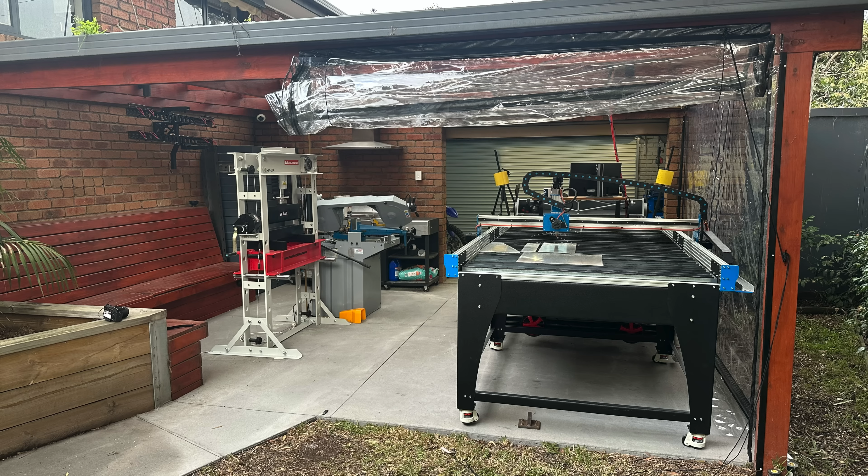In this video, I'm deleting my outdoor entertaining area and making room for a shed and garage expansion. I'll be setting up some new equipment, including a CNC Plasma Table, a Panbrake, press, bandsaw, and more. Once this is finished, I'm going to give you a tour of my garage and tiny shed, which has now morphed into an engineering workshop.

First things first, let's start with the garage. It's looking a little tired and dreary and could use a fresh lick of paint to brighten it all up. Cue the time lapse.

Geez, that looks a little bit better. Shout out to George and Daniel for the help on this one. They did a marvellous job.

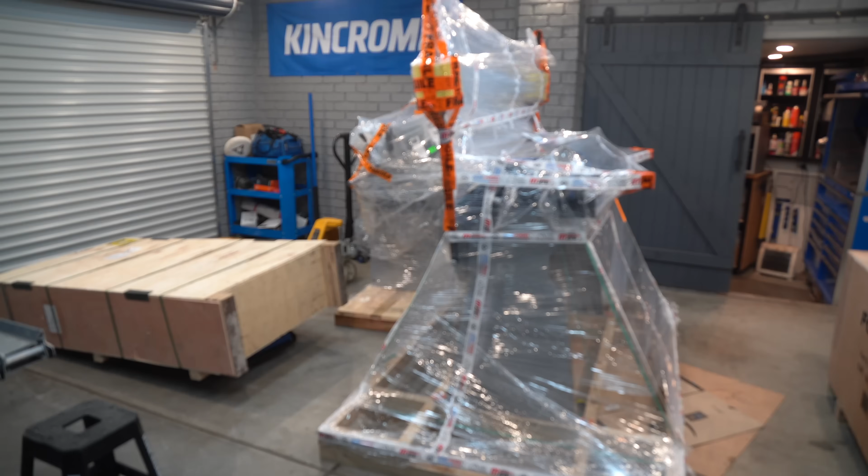So as part of this shed upgrade, I have a huge delivery from Hare & Forbes Machinery House. And I know what you're thinking, where are you going to put this stuff, Rich? That's a really, really good question. And the answer lies within my outdoor entertaining area. So let's go have a look at that.

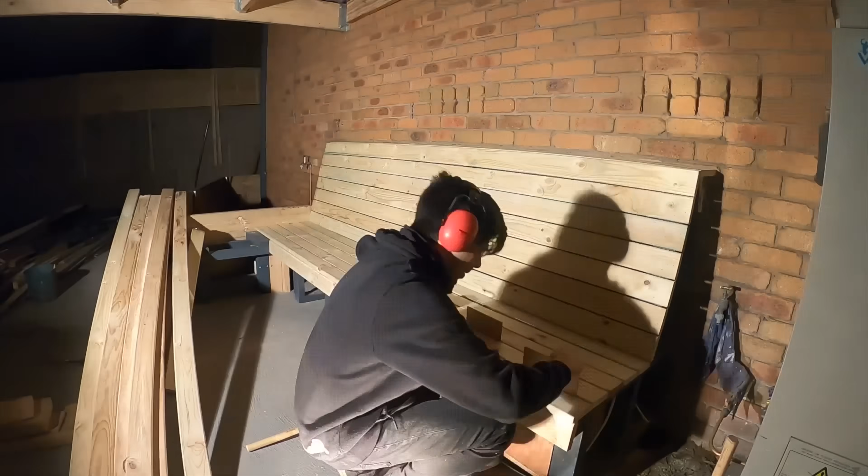This is my backyard, and I've proudly crafted everything you see here from scratch over the past 5 years, and turned it into a usable outdoor area where I enjoy kicking back and having a beer. While this space is really nice to have, it's used infrequently, and it's prime real estate for a shed expansion. All I've got to do is remove the table and chairs, put some walls up, and we're good to go.

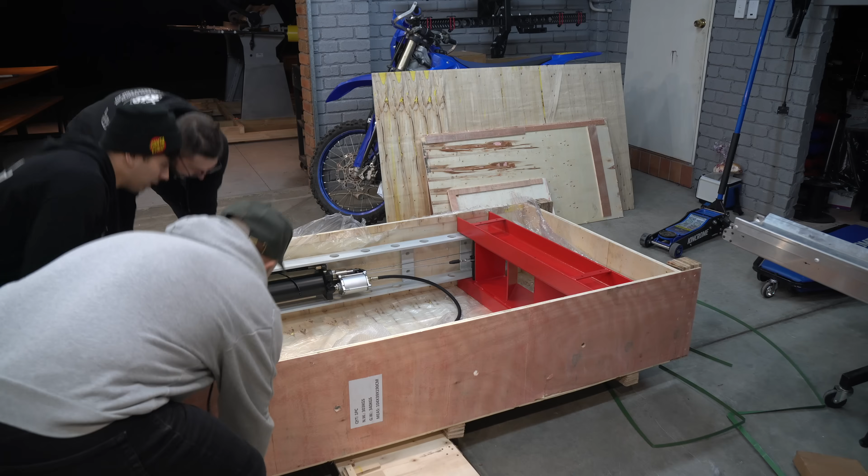Now that you've seen where this stuff's going to go, let's open it up and I'll give you a bit of a run through of what I have. What I'm unwrapping here is a Panbrake, a bandsaw, an air compressor, and a pneumatic hydraulic press. These tools, in conjunction with the CNC Plasma Table, are a mega upgrade to my shed and will significantly change what I can make at home. Later on in this video, we'll go into all the details of these tools, but for now, watch me struggle to set everything up in this tiny little space.

This is a car trailer with a full-size Blue Carve CNC plasma table on it. The challenge is to get it off without a forklift, as that's how it was loaded on, without sustaining any damage. Let's see how we go.

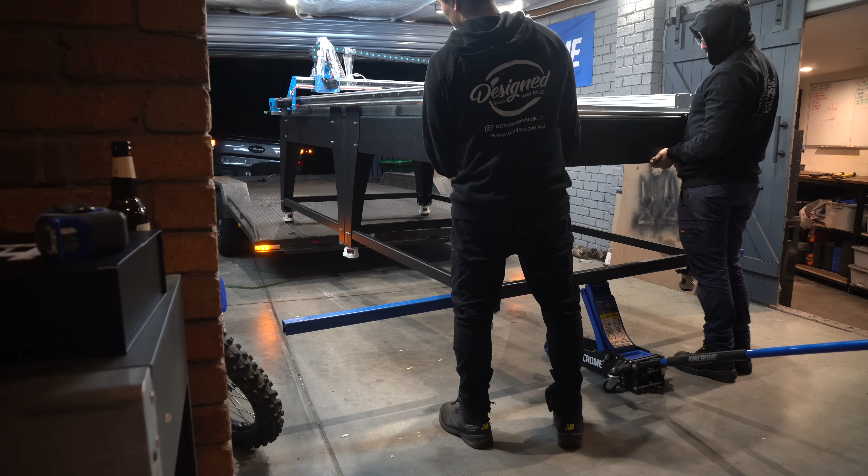Look at that, superior jacking control. I just want to give a huge shout out to the team down at Hare & Forbes for helping me out with all this new equipment.

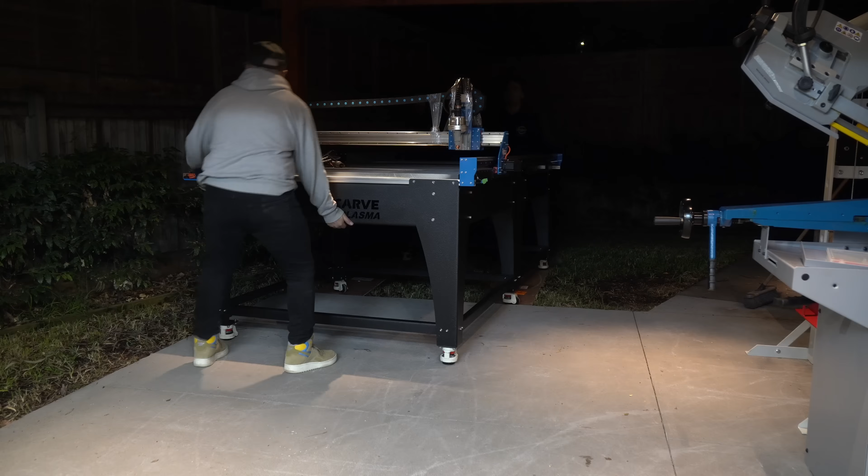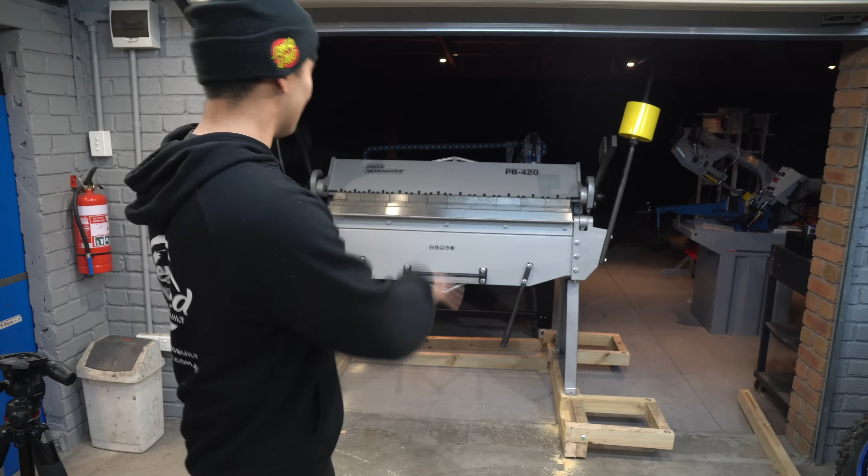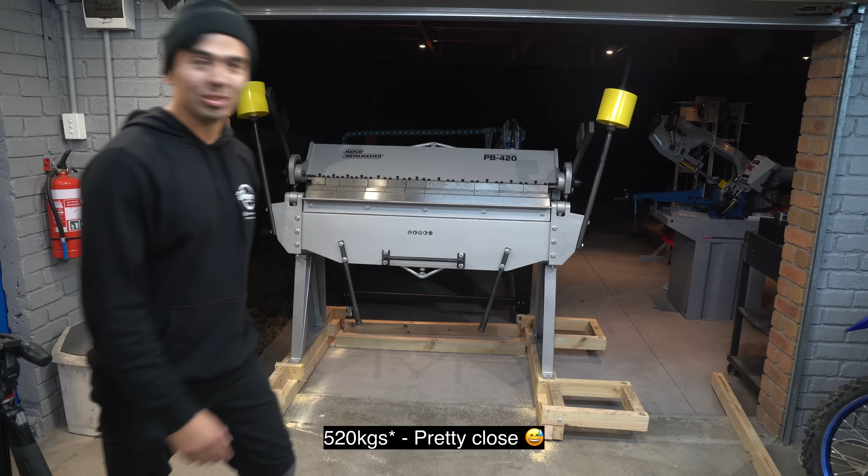So everything we think is in position, but we have one big problem. This is really heavy. I'd estimate like, I don't know, 500 kilos or something like that. So what we're going to do is get a jack under there with a piece of timber and hope for the best, really.

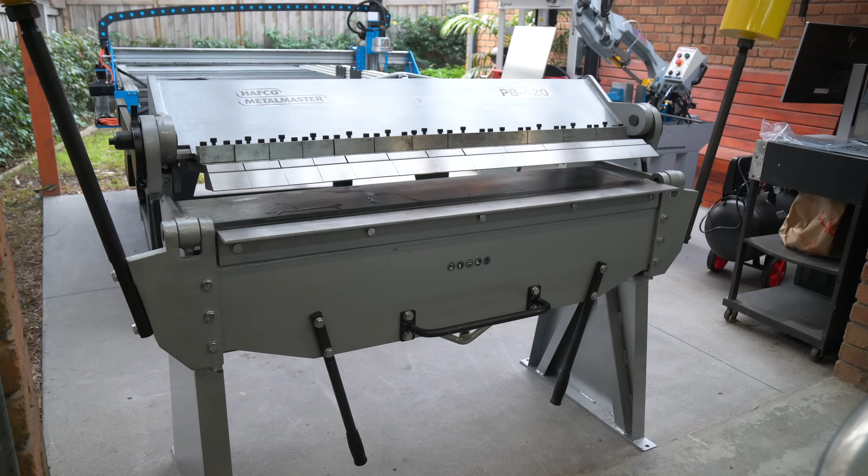And the next morning, my shed expansion was revealed. Still a lovely place to kick back and have a beer, but now I'd be staring at machinery. All of the new equipment required a bit of setting up. The folks at Hare & Forbes had done a lot of it for me with the Panbrake and the bandsaw, so I could get started with the plasma table.

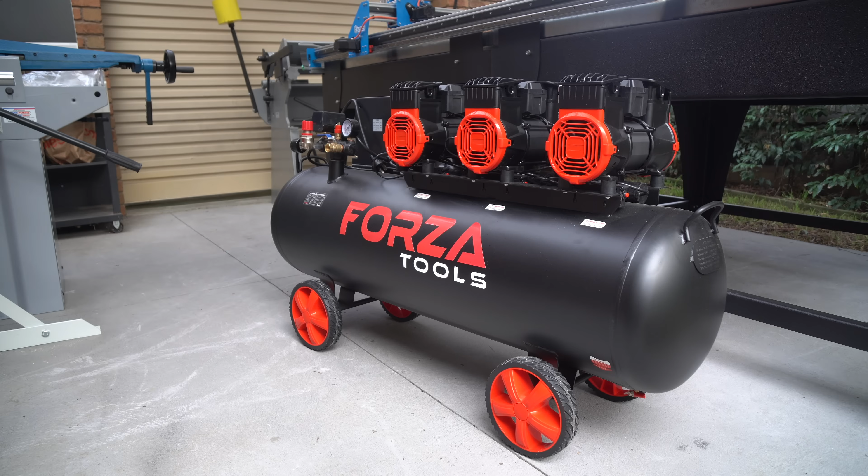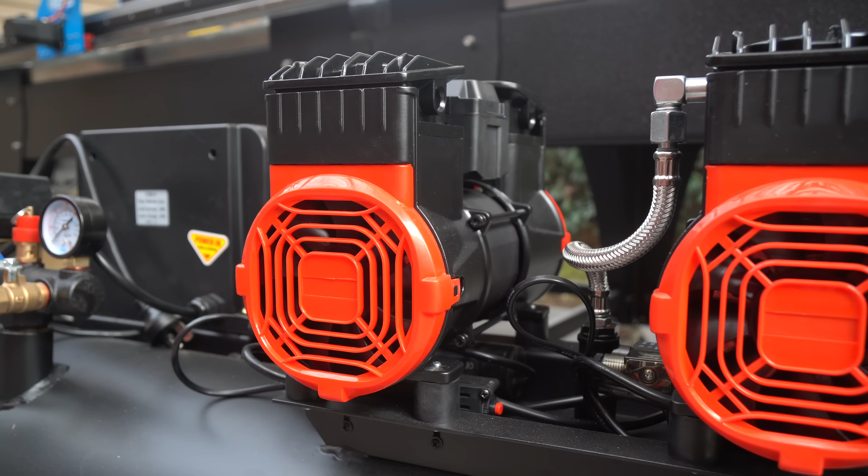To run the plasma table, you need a good compressor. This is a Forza Tools 120 litre 3300 watt Hush air compressor, so it's pretty quiet, with a free air delivery of 280 litres a minute that I got from Hare & Forbes, which would be powerful enough for my setup. The table also requires the BlueCarve controller, a plasma cutter, e-stop, and a computer of some sort, and I wanted to mount it all so it was nice and neat. Luckily for me, BlueCarve have designed this plasma table with some free space underneath, and I'm going to take advantage of it. I had some aluminium offcuts lying around, and the plan was to suspend the compressor and make a shelf to mount everything underneath the table. This way it would be all off the ground and make cleaning and moving the table a lot easier.

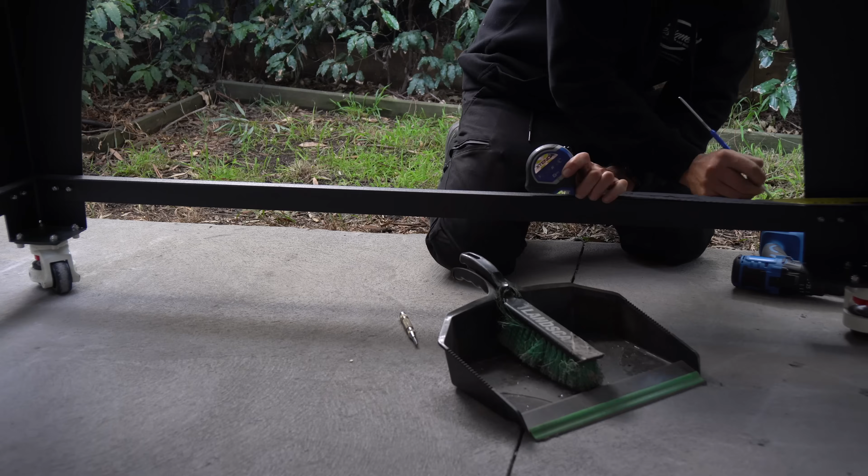Dulux Duramax Semi-Gloss Satin Black, not a sponsor, but absolutely could be. I'd opted to bolt everything under the table. Normally the welder is the first thing that I reach for in the shed, but I didn't want to wreck the shiny new powder coat, so bolting seemed like the more sensible option.

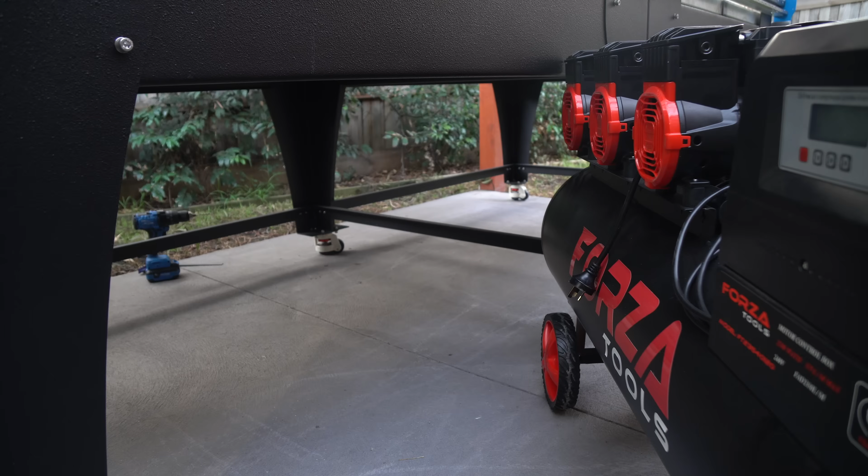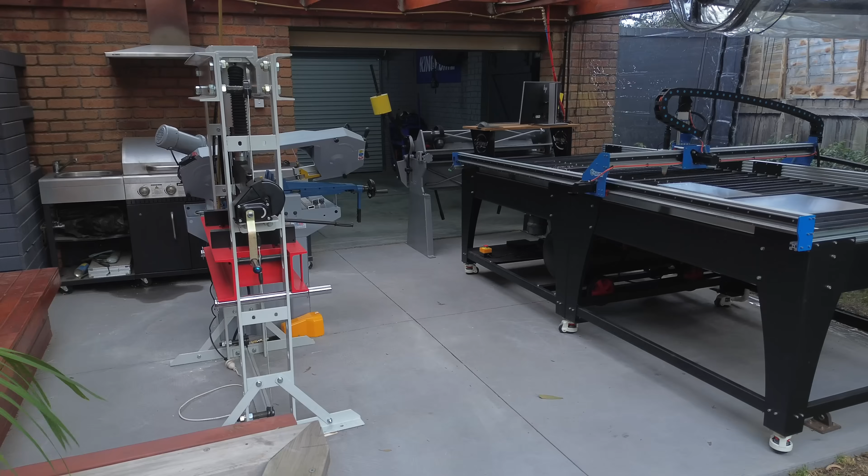Now you may be wondering why I'm upgrading this space and not moving into a bigger one. Let me tell you about it quickly. I would love a bigger space, I really would. There are a few options I have, but they would mean taking on more financial pressure by getting a bigger mortgage or renting a factory. I don't really want to be in a position where I have to take on more work to afford a space that I don't have the time to use because I'm working so much to pay for it.

For me personally, the type of work I really want to be doing is developing my own products and passion projects, and to do this, the thing I need most is time. The main reason I'm upgrading everything at home is to save time. Currently I have to drive half an hour to go cut something on the plasma table, which doesn't sound too bad, but if I got a dimension wrong or the bracket needed to be designed differently, I could potentially burn a whole day going back and forth, burning fuel and most importantly, my time.

I look up to a lot of engineering entrepreneurs who started their business from sheds. James Dyson, for example, made 5,127 Cyclone vacuum cleaners over 5 years in his shed before he was able to bring his product to market and turn it into a $22 billion company. And if that isn't inspiration enough, then I don't know what is. They ran lean for as long as possible, and that's what I plan to do as well.

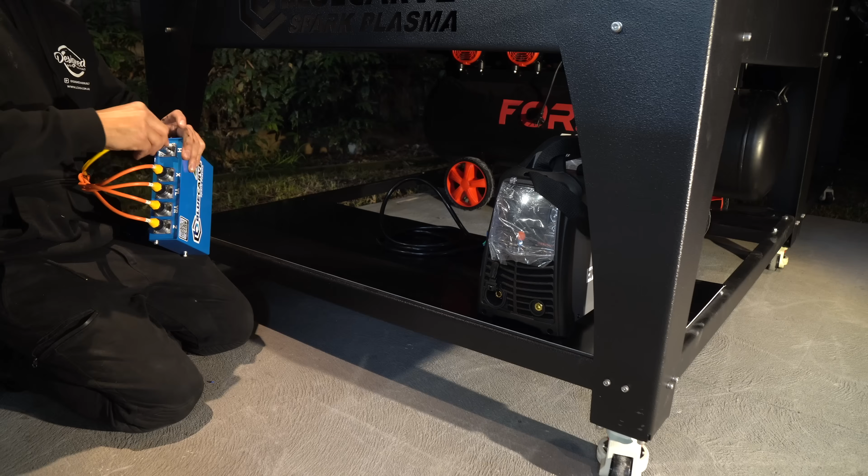Alrighty, so you can see here I've got my new shelf. I've got everything installed on it. So now what I need to do is build a computer desk and also clean up the cables, because that hurts my eyes.

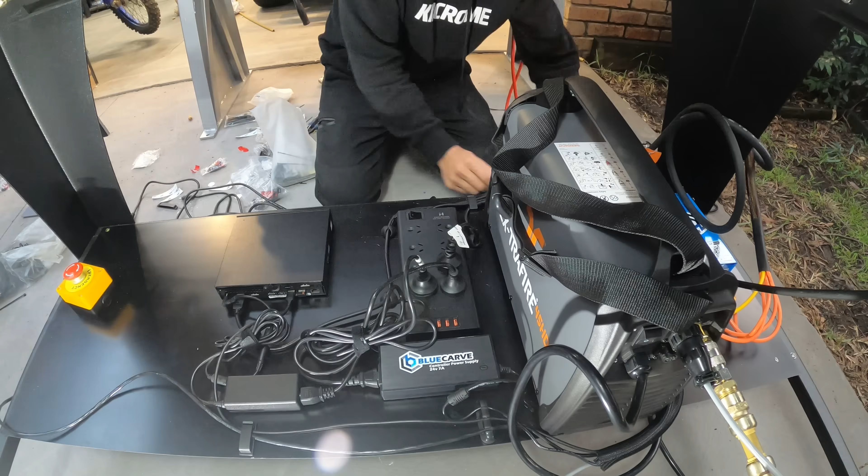All the cable routing is done now and everything is Velcro down, so you can pull it off if you need to, but otherwise it's not going anywhere.

Now that the wiring was done, it was time to move on to the air plumbing. It wasn't just the table getting plumbed, my whole workshop was getting some TLC. We're using plumbing fittings and plumbing lines to hook up the air lines for the compressor, plumbing everything from the compressor underneath the plasma. You'll have lines coming up off this to the press, to the plasma, through the workshop, and to the hose reel as well.

Wouldn't read about it, Rich. You wouldn't read about it. Alright, so now you can see the compressor set up there, air filter set up there.

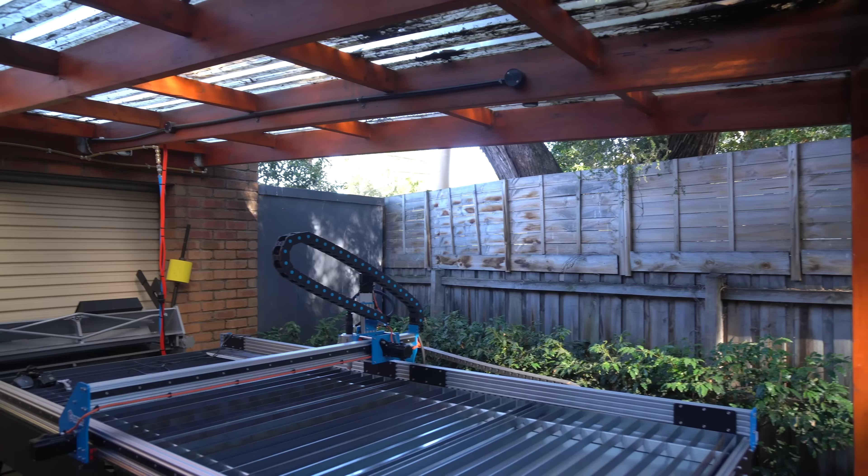Alright, so you can see the outdoor space now, and one of the big problems I have is water ingress. I don't want rain coming onto all my shiny new machines. So the plan is, there are a couple of thoughts here. I could put walls up and make it all clad and nice, but it is an outdoor area and I don't think that's going to really add any value to the house.

The other option is to just use clear plastic drop sheets, one here and then two long ones over there, and that will just keep it an outdoor area. It's not too much effort, hopefully. I'm about to do it right now, so we'll watch this space and find out.

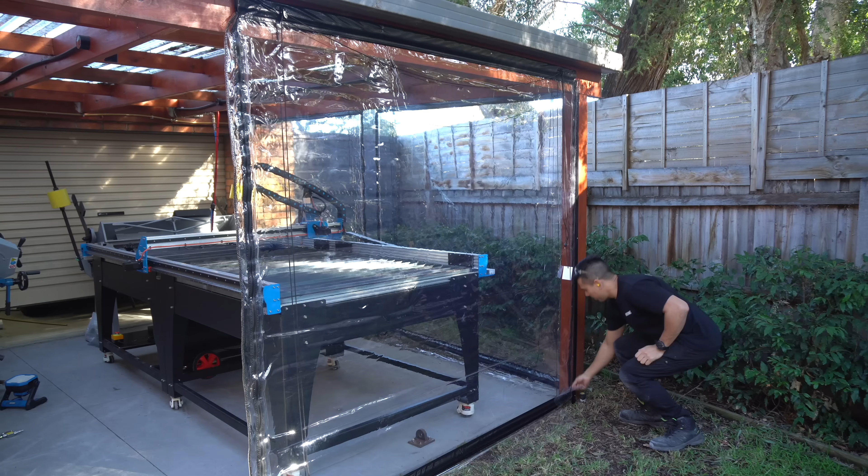Righty, so these clear curtains are all done now and they're anchored to the ground, but I can actually move them up, and I think I will. When I'm doing a lot of cutting, you can get dross splash and that sort of stuff and water, so I don't ruin them I'll just roll them up, which is quite good. It's actually quite good for the setup.

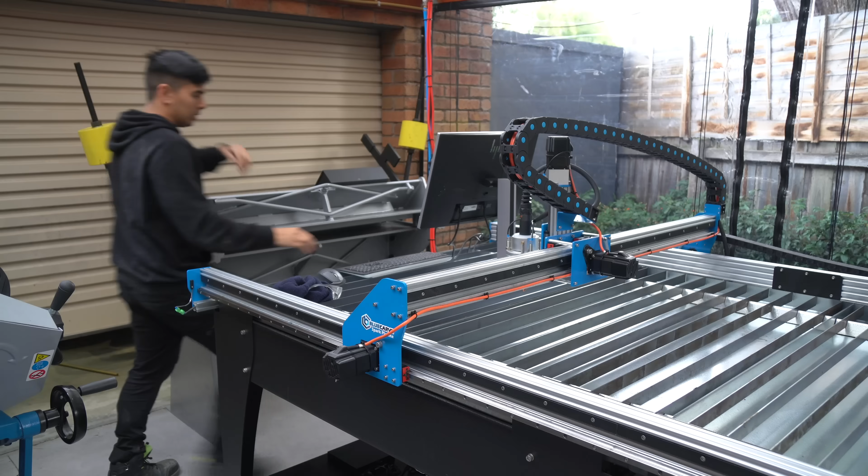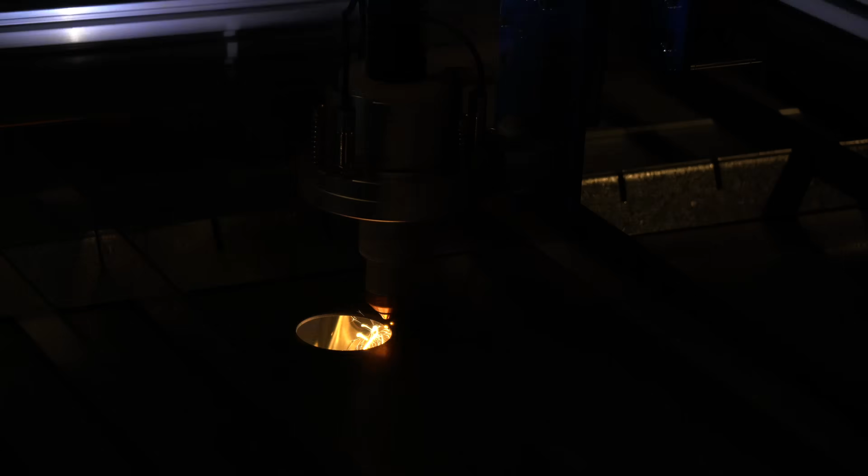It was finally alive, and I wanted to put drain holes in the waterbed so I could change the fluid easily when it came time. You don't have to do this, you could suck it out every time, but it seemed like a pretty easy thing to do while it was all empty. I'd spent a few hours putting in the right cut settings and dialing in the cuts. Now that it was up and running, I could use it to cut its own drain holes.

Time to plumb the drains. We were using pretty standard plumbing drains and had 3D printed a spacer to ensure the thread had engagement. George, my neighbour, had graciously offered to help, and with all his plumbing expertise, he managed to knock it out pretty quickly.

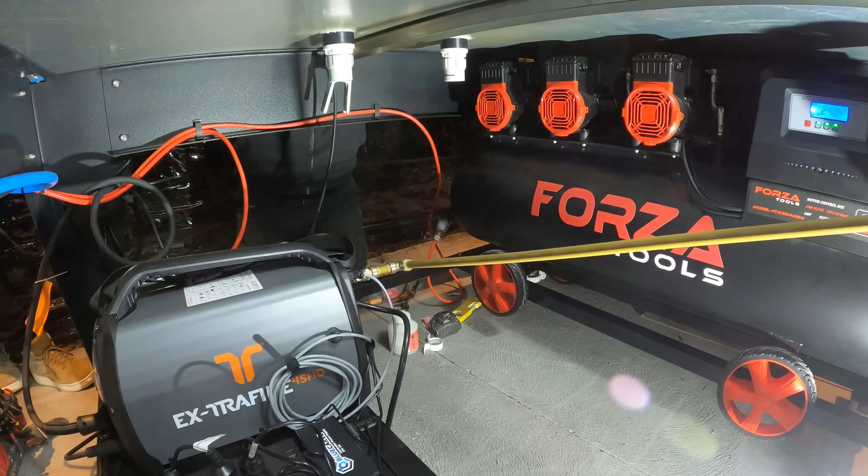Thanks, Georgie. You're welcome.

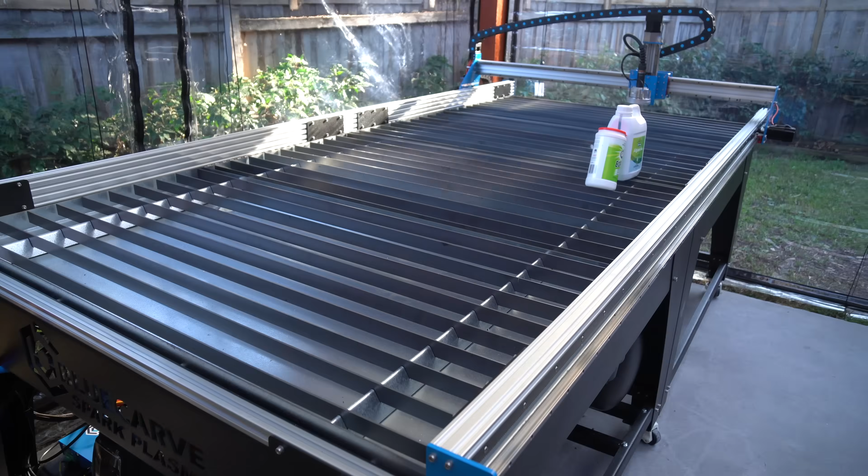I could now fill up the waterbed, and I was using some borax and algicide to keep the water mold free. So the drains to my plasma are all run now, and I'm going to put a flex hose, or just a hose, on the end of that, and yeah, we can empty it into whatever.

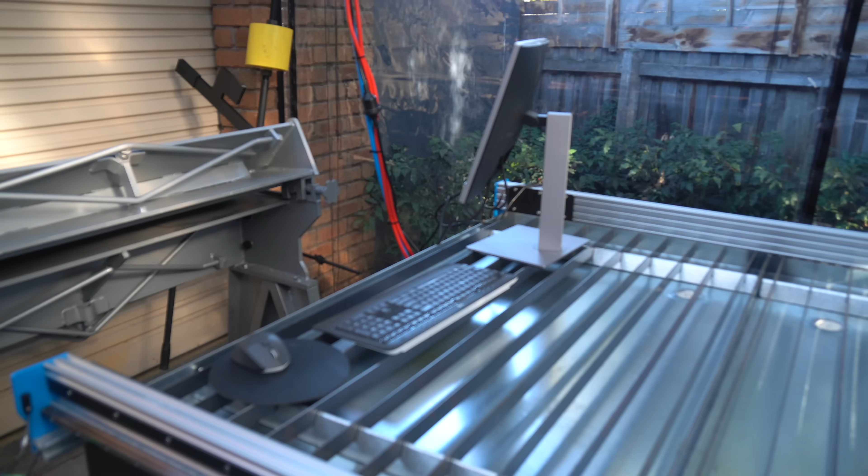Now that the drains were complete, it was time to build a proper spot for the computer, which had been sitting on the plasma bed until now. If only I had a way to fabricate some brackets.

Now that I had my dimensions, it was time to draw up the desk mounts in CAD. And in a first for the channel, I'm going to explain how I modelled it.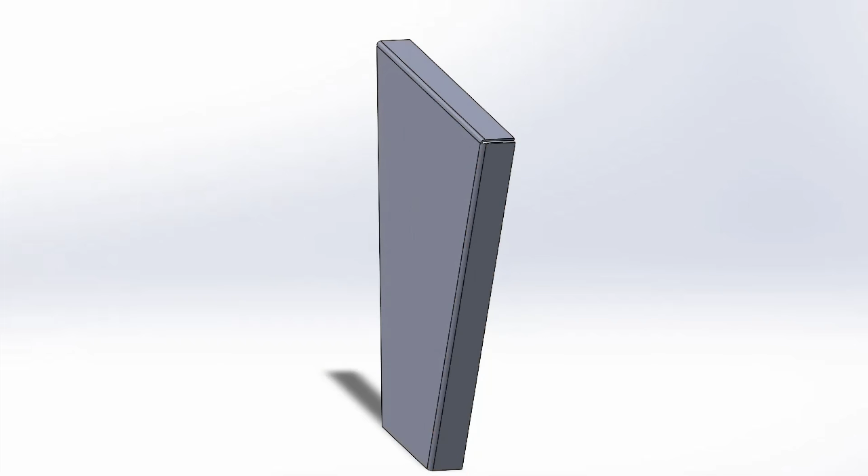I started with the outside geometry, extruded it by 50mm, which would be the overall width. I then used the convert to sheet metal function, choosing the back and the side edge for where I wanted my bends to go. I then added fillets so I wouldn't cut myself on the piece.

Looking pretty good now, time for some holes. On the back flange, I added two 9mm holes, which would mount into the table, using a linear sketch pattern and a cut extrude. On the top flange, I did the same, but there were 3 holes, for the fixing holes to the table.

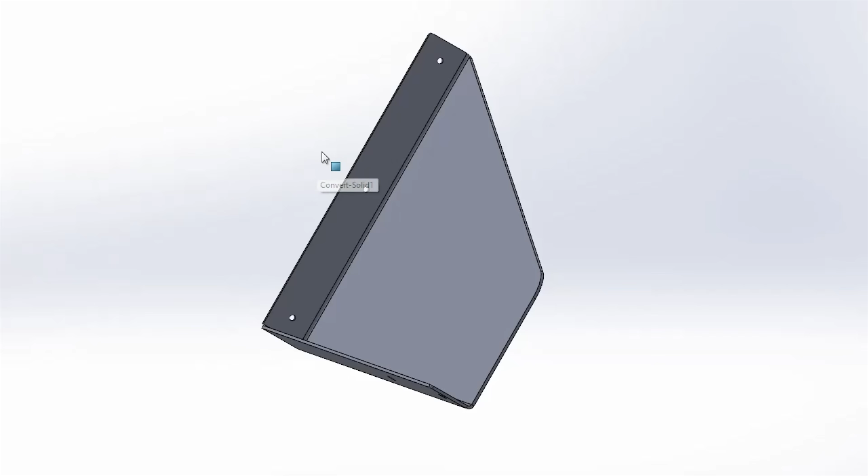Now for the finishing touches. It's time to add my logo, which I brought in as a vector file. I mucked around with it, scaling it and getting it into the right spot before I could cut extrude it through. Then I added in some little bits to keep the middle of the letters using a boss extrude.

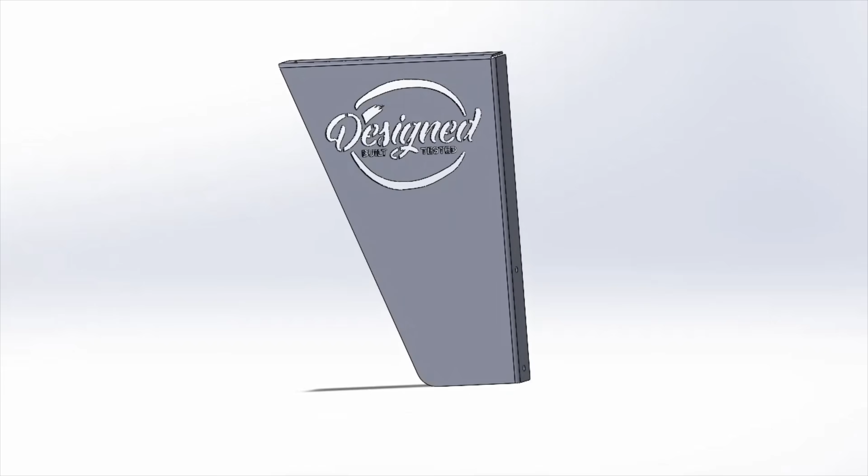Now, normally you hear me bang on about how long things take to model on this channel, and they do, especially something like a suspension system or a complicated full car assembly. Something like this though is relatively simple and a great one to get started on. This actually took me 6 minutes to model, 2 minutes to get my shape in sheet metal, and then 4 minutes to muck around with the logo. For anyone who's messed around with logos in CAD before, you'll understand that it's never that straightforward.

Okay, so this is done. Now we're ready to cut it out on the plasma table. This is really the first cut that the plasma has done. I did some circles yesterday just to practice for the drain hole, and they came out really clean, to be honest. Let me show you how easy this thing is to use.

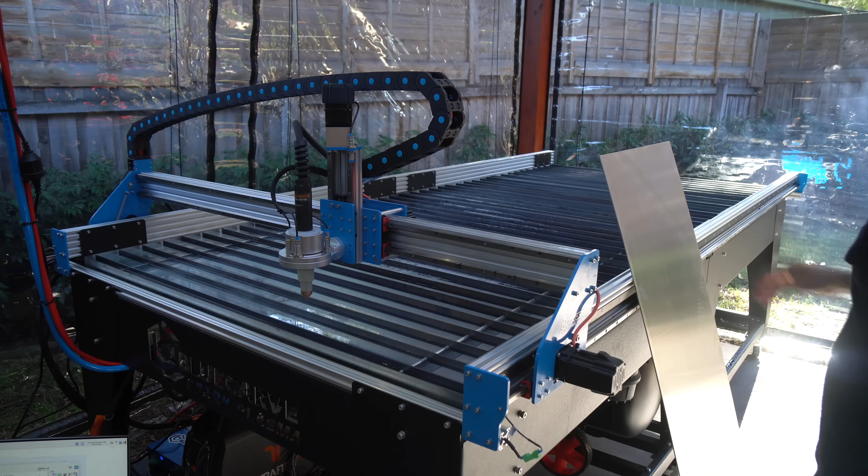Basically, just put the sheet on. I've got a heap of scrap material. Line it up - I generally do that by eye. Actually, it's not a good edge to line it up on.

Once my files are nested, I use a function on the MyPlas software which outlines the perimeter of the cutting area and allows me to make sure that my material is big enough.

Excitingly, it's time to cut the first piece now. Unfortunately, I had the settings for the lead-ins wrong on this one, and it was piercing on the outside of the holes instead of the inside. It looks pretty bad, so I'll have to cut this piece again.

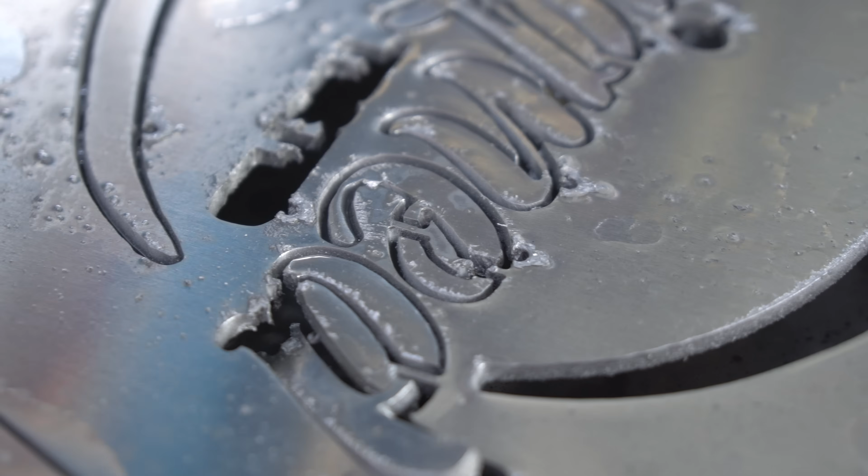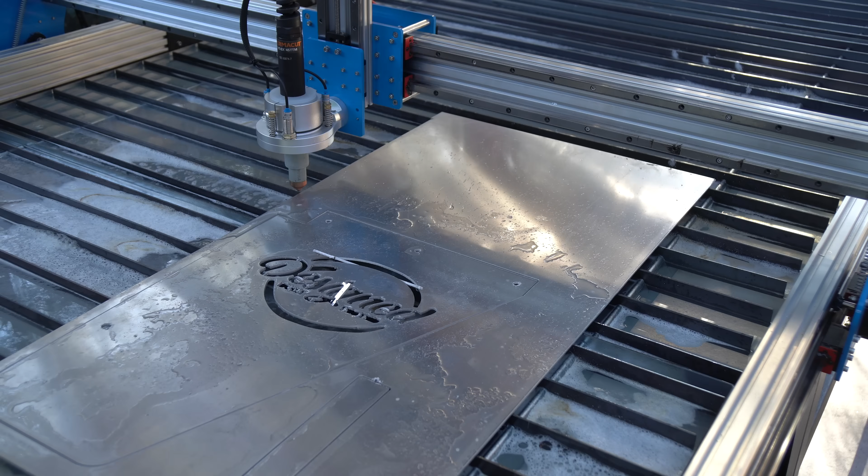I changed the lead-in settings and it was now piercing on the inside of the waste material and cutting brilliantly. Once that was done, I cut the other bracket, and I could use the manual guillotine function to chop off the waste material from the part of the sheet that I wanted to keep.

At this point, you may be wondering how this will go with my neighbours and all the noise, and that's a fair question. I just want to say that I get along really well with my neighbours, and a setup like this makes less noise than an angle grinder, and I'm respectful. I'll only cut during business hours.

I don't plan on doing cut jobs for other people. While I could use this machine to make money, I have to be selective of where I focus my energy. It really is for doing my own projects and prototyping. I may only run it 2 to 3 times a week for 10 minutes a time, and it doesn't sound like it's going to get a lot of use, but that's only for now, and the circumstances may change and we may move into a bigger facility and have more people using it in the future.

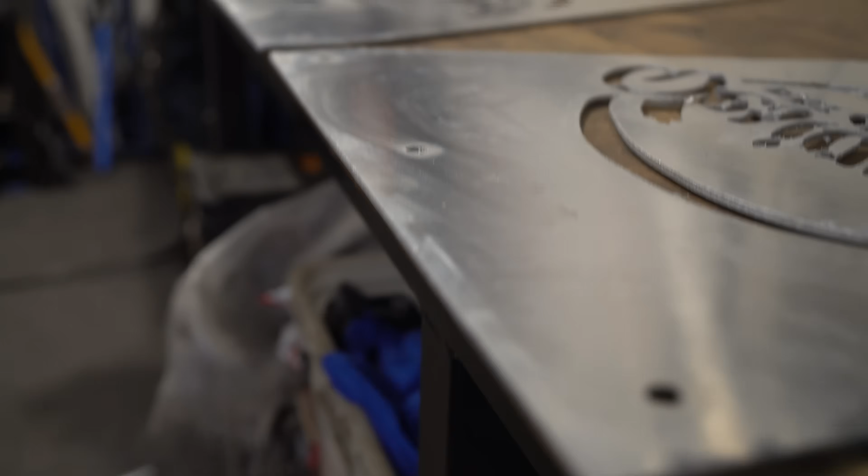Looking at the pieces now, you can see the backside, it's very clean. This is out of the box, not fiddling with any settings, and there's barely any dross along these edges. You can see some bits with a little extra dross build up, but honestly, pretty amazing out of the box.

Just reflecting on it, last time I got this logo cut about this size, I actually deleted the build and the test because the laser couldn't do it. It's just too much heat concentrated in such a small area in such a quick time, and it kept blowing through as well.

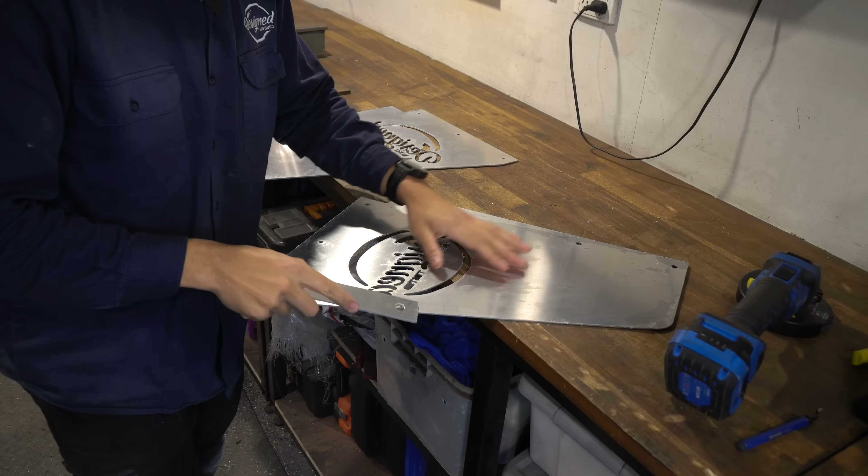They say if it's cutting well, you should just be able to knock the dross off with another bit of alloy or steel or something like that, and you can do that. But honestly, I find one of these stripper discs is better. I think it's quicker, you just run over it once. It's not too abrasive, it doesn't take off too much.

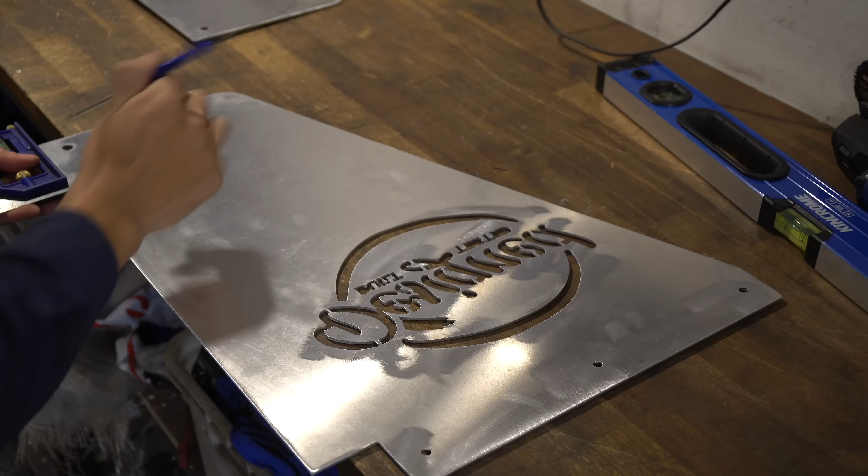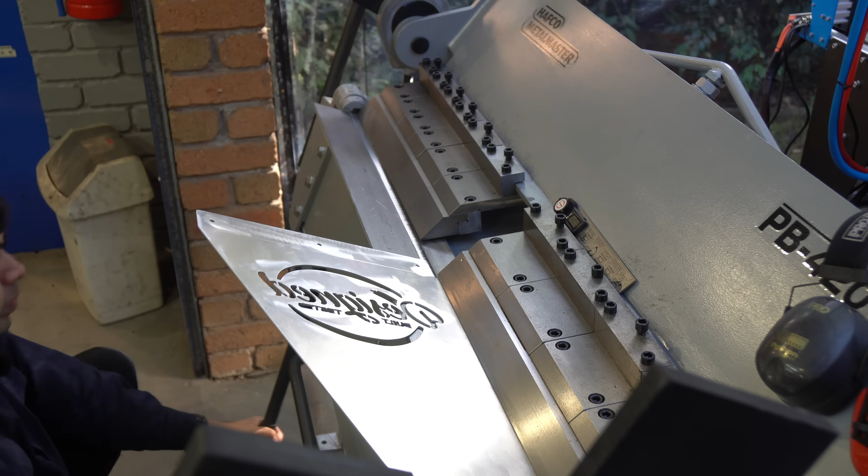Onto the Panbrake now to get all the folds in there. Luckily it has removable teeth, so I could pull out one of those middle teeth, which meant I could do all my folding properly.

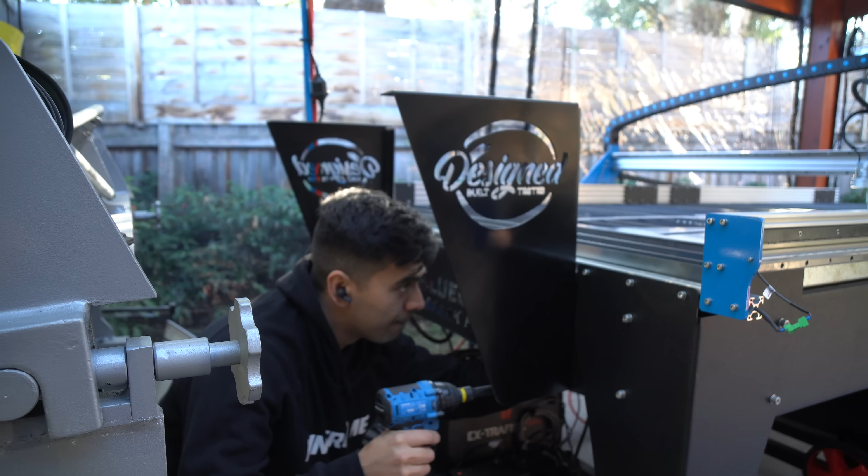This is a $40 project panel from Bunnings, which I was going to use for the desktop, and the brackets were made out of spare 3mm aluminium that I had lying around.

The table is set up now with the plumbing and the electrical. It's on wheels, so it can move a little bit, obviously limited by this umbilical here. But if I needed to move to a different garage or shed, it'd be very easy - everything's contained in the table.

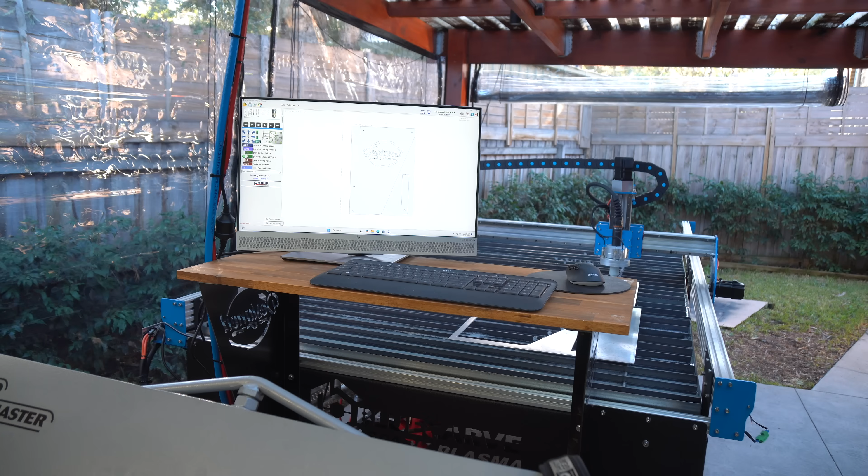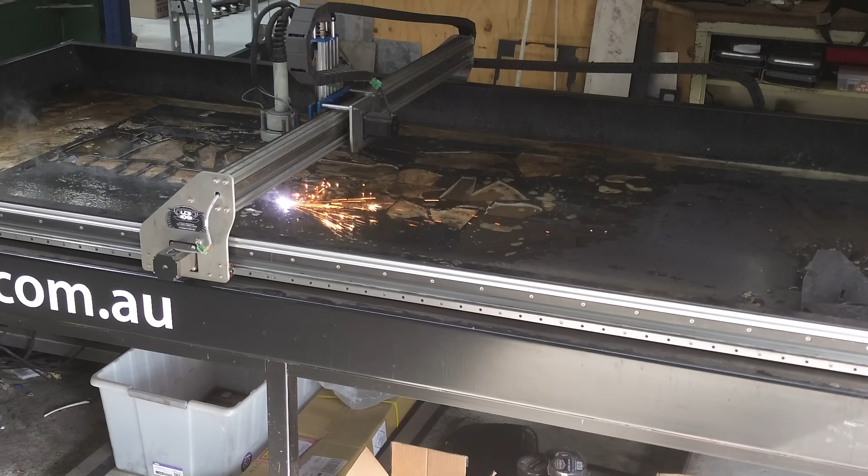I've had one of these machines for the last 3 years, and Laurie and I co-own one at LCS, and it's awesome - that's why I've got another one. I needed to look no further. These are the best bang for buck CNC plasmas on the market. You just can't get anywhere close to them.

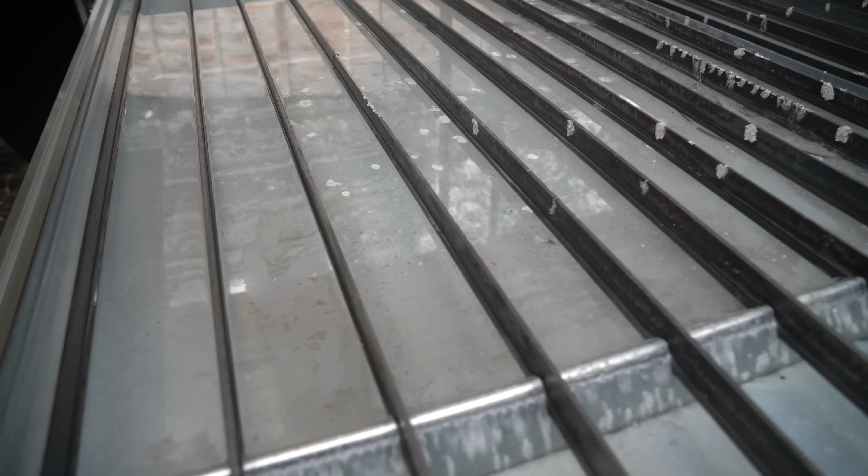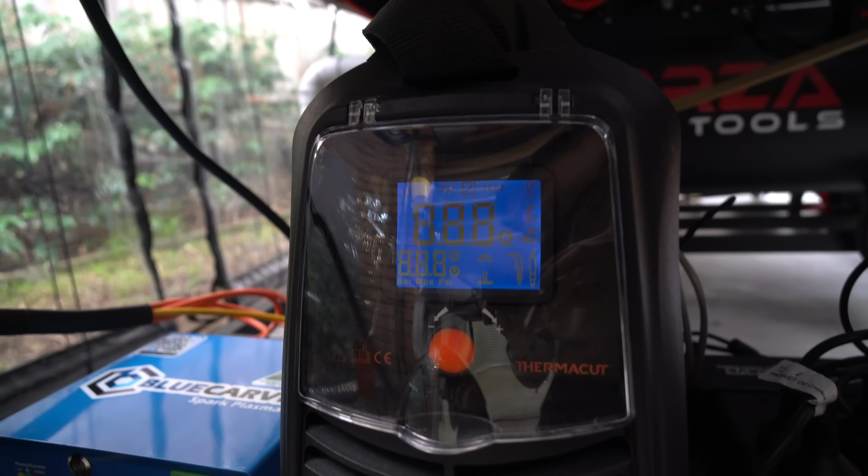Just to give you an idea of this setup, I believe that everything here minus the plasma cutter - so table, waterbed, gantry and controller - is around $8,000. And then I've lashed out and bought a pretty reasonable plasma cutter. This is a Thermacut 45 HD single phase. We switched to Thermacut on my other table a number of years ago and wouldn't really bother looking at anything else. These are absolutely fantastic value for money, and they pack some punch.

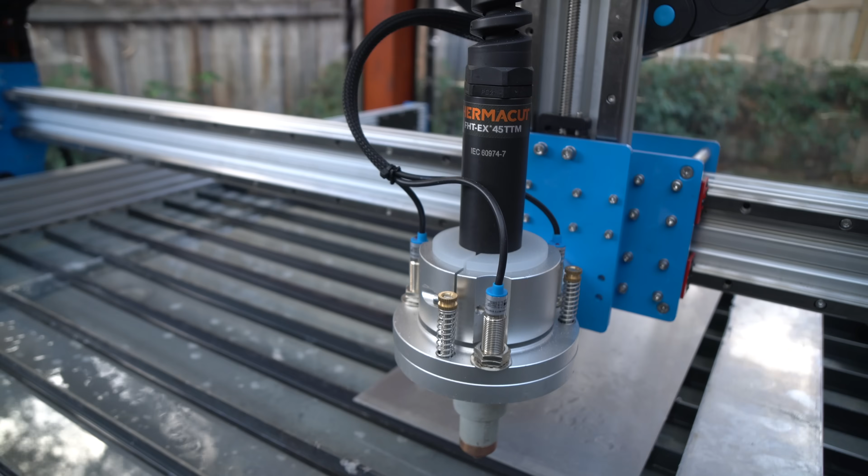That is good for cutting up to like 25mm, and I generally don't cut those sort of thicknesses at home - I'll only really be doing 3, 4, 5, and 6 at home. Maybe one day, depending on what we're developing, I might cut 25mm. So I've spent a little bit more money on the plasma cutter. I think a unit like that is around the $3,800 mark. So this is essentially a 12 grand setup.

And then I've added a computer. Now this computer is really basic - it can run CAD software, but it is kind of the bottom of the barrel. It's really just a purely dedicated plasma computer.

I've done that because we've used the one at LCS a heap, and basically whenever you're cutting, you've got dirty hands and you're moving material as well. I do think having a dedicated plasma computer is a great idea, something you don't really care about. I have an expensive laptop, and putting that into the table every time, cutting with dirty, wet waterbed on your hands and metal - I do think you'd probably damage your laptop, which would outweigh the cost of having a dedicated computer.

Just to give you an idea, you could get something like this off Facebook Marketplace for $200. The plasma software itself is really not that demanding in terms of its requirements for a computer, so it's pretty cheap just to have a dedicated one on your plasma table.

Now, if you wanted to do proper CAD and stuff like that, I'd recommend getting the north of $1,000 computers. And we're going to go into my computing setup in this video as well, because I do get asked about what computers I run quite frequently.

The table for this setup, like this was a project panel from Bunnings, it was $40. Then the aluminium I had lying around, you could put a material value of $40 on that. You've also got to add in the air compressor cost. A unit like I got is around the $1,500 mark, and there are a bunch of air compressors out there. I've also got an air filter underneath it, which was like $150. Overall, including the compressor and filter, you're at about 14K for this setup. I think that's really reasonable for what you're getting.

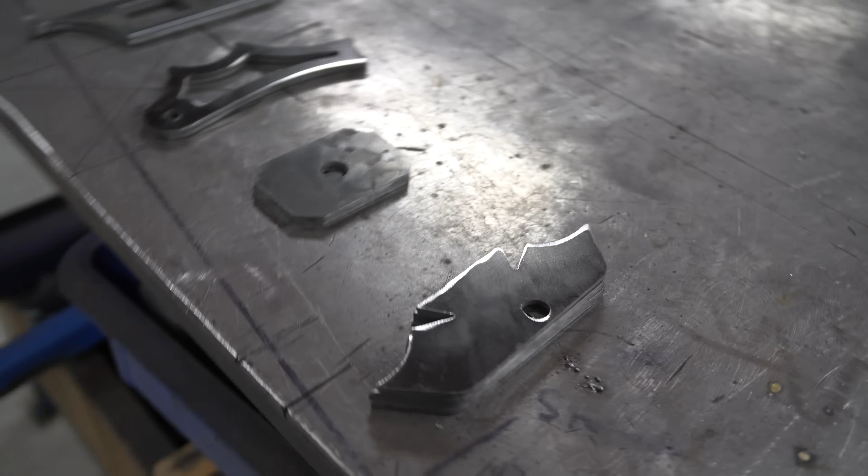Some of the stuff we've been able to build on this table over the last few years is actually unreal, and it has changed my life in regards to quickly prototyping products. Stuff for the bike racks and the moto racks, I'm able to just churn out iteration and iteration. We've cut the dirt bike canopy, I've cut canopies, cut a 4-link suspension on it, I've cut a heap of brackets for cars.

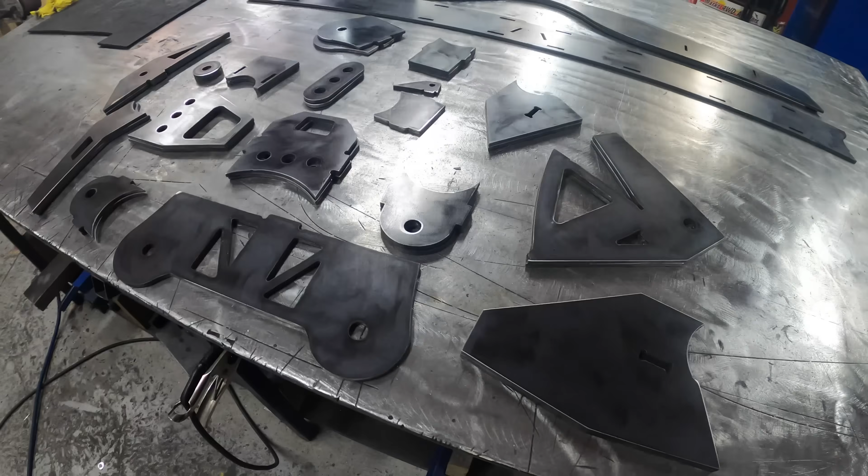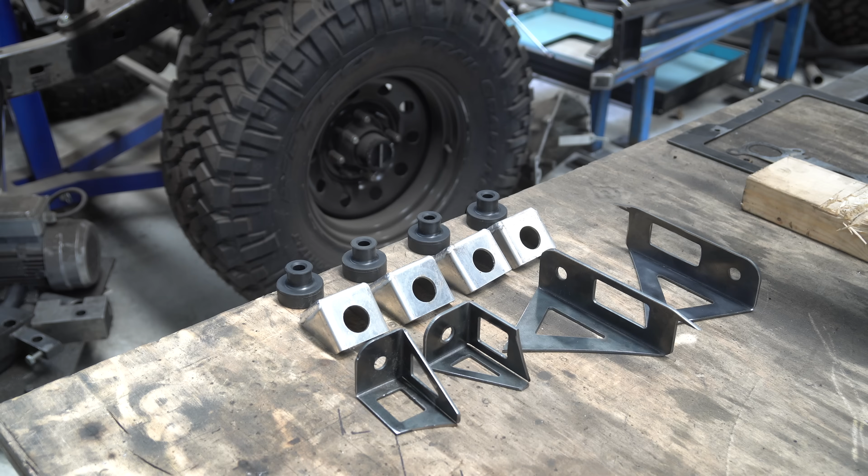If you love working in your shed and you love working on your projects, whether that be cars or motorbikes or whatever it may be, and you want to take your fabrication to the next level, you need a CNC plasma table. Doing stuff on the laser is great, and I've done that before for little brackets and one-offs, but for one-off pieces, you just cannot beat something like this in your yard. It is so quick to use and turn around parts, and I highly, highly recommend one.

When you're comparing this setup to more expensive ones on the market, you instantly start looking at like 20, 30 grand, and I just could never justify it. I think maybe if you're doing more production run stuff for heavy industry, that's when you start looking at an industrial plasma, but for one-off brackets, for small business, for prototyping, this is the machine for you. You could do production stuff on this as well, there's no reason why you can't.

Where I built my canopy with Justin from Absolut Custom Fabrication, he was building canopies on this machine, and he just let it cut for hours on end. What I'll be using it for is predominantly prototyping and just my own projects.

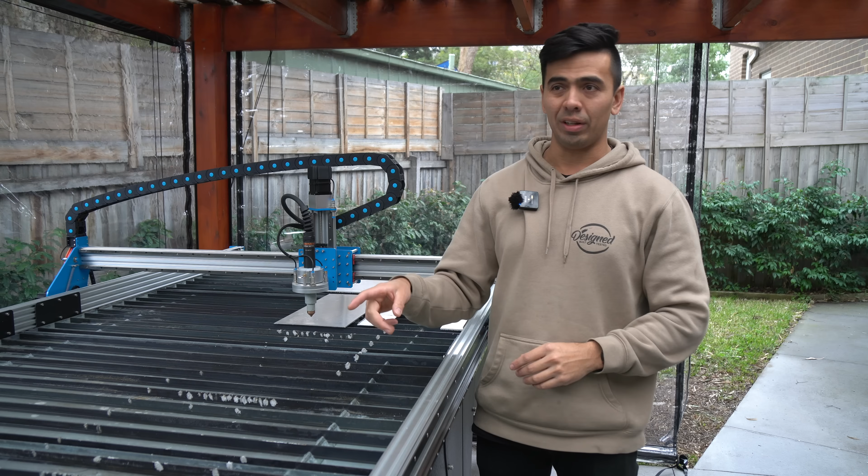Another thing with this plasma table is it's kind of like an open source plasma table. It's not BlueCarve's proprietary software, it's actually a third-party software. What that means is you can kind of spec this the way you want. You could also spec this machine out with like a 100 amp cutter, which could cut up to 50 mil in thickness. That's when the bed strength becomes an issue.

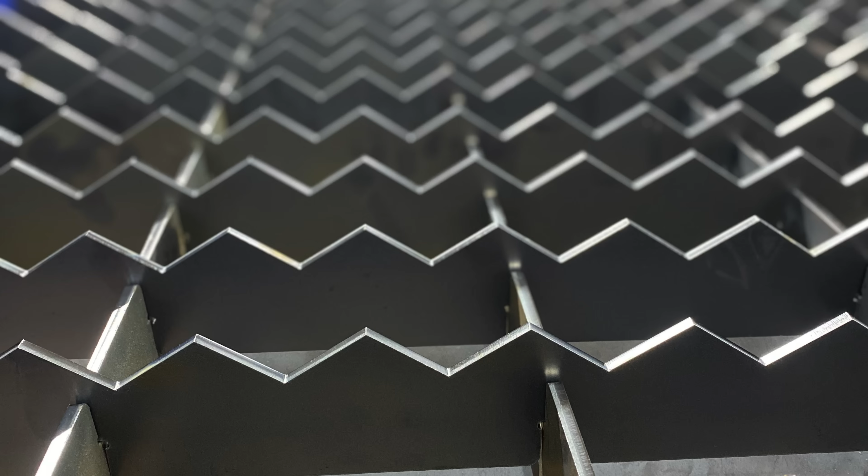These beds, as they come from BlueCarve, are designed for 12 mil sheet, which is actually really, really thick stuff. But if you were doing more of an industrial application, maybe you'd need to look at building your own bed. That's what we've done at LCS, we built a heavy duty bed ourselves. But in the 4 years that we've had that table, it's very, very rare that we have a sheet thicker than 12 mil on the table anyway.

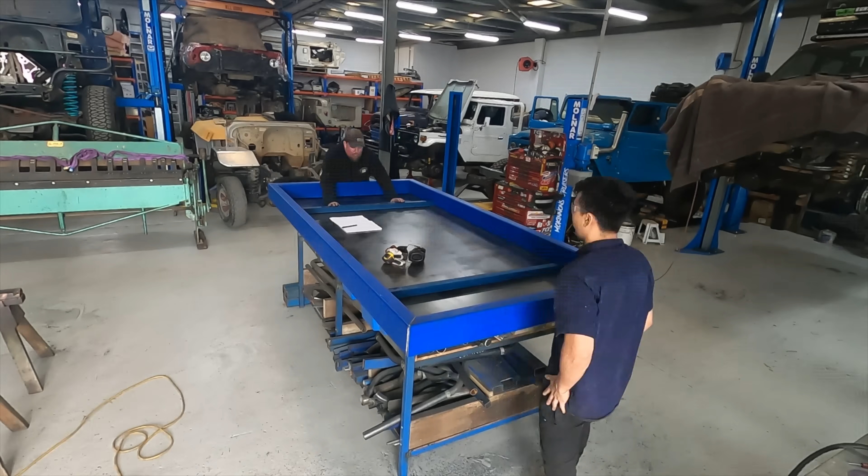So you've just got to have a really good think about what you're cutting. That LCS table, the way it was built with all the steel leg, no doubt you could put a sheet of 25 mil on that. But logistically, you need overhead gantries and all of that sort of stuff. So you just got to have a good think about exactly what your needs are.

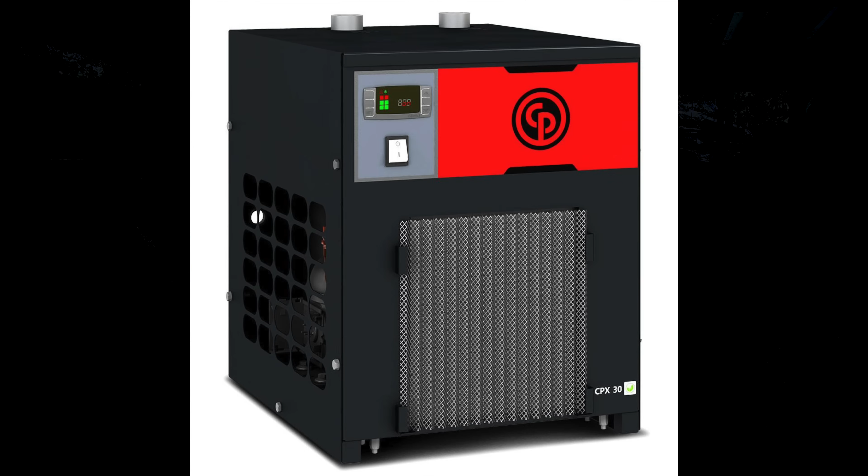This machine is extremely customizable. The only other thing I may consider for this machine is an air dryer, and they're about $1,500 depending on which one you get. It really does depend on what you're cutting. If you're cutting really big pieces and your machine's on for a long time, then an air dryer is absolutely going to benefit you. For small brackets and stuff, mine's cutting pretty good already, so I might be able to save myself $1,500.

I have used and owned one of these for the past 3 years, and I think it is absolutely awesome. It's designed here, manufactured here. I can't speak more highly of it.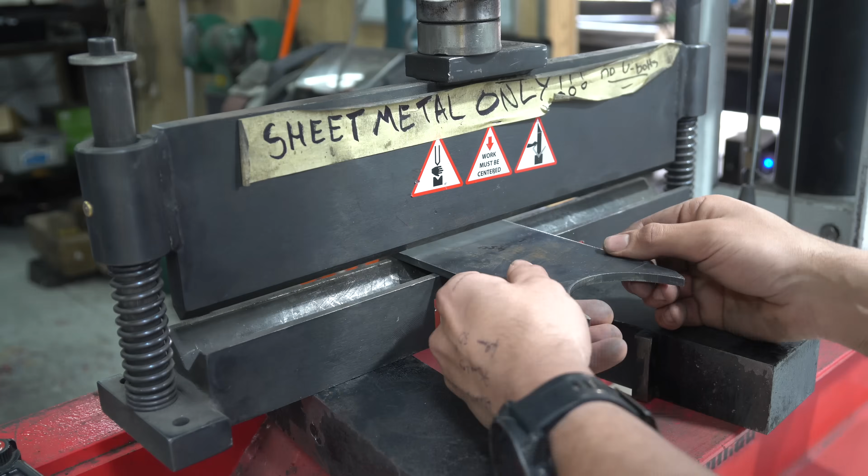This is a press brake attachment for the press, and it allows you to fold sheet metal. I've been using this for a number of years at LCS as well, and we have made so much stuff on it. The main limitation of this compared to a real press brake is that it's really hard to hang a return over the edge, so you can't necessarily fold everything.

Essentially, the foot pedal is going to control the pneumatic cylinder, and this is going to absolutely change what I can and can't do in my backyard - a lot of sheet metal projects I'll be able to do here now.

I'd love a CNC press brake, and that might be a bit more feasible when I move into a bigger space. But realistically, you're dropping another 20K on one of them as well. For the amount that I actually use it, which is probably 5-6 times a year, it is harder to justify than something like this, which is a much cheaper setup, and it is multifunctional.

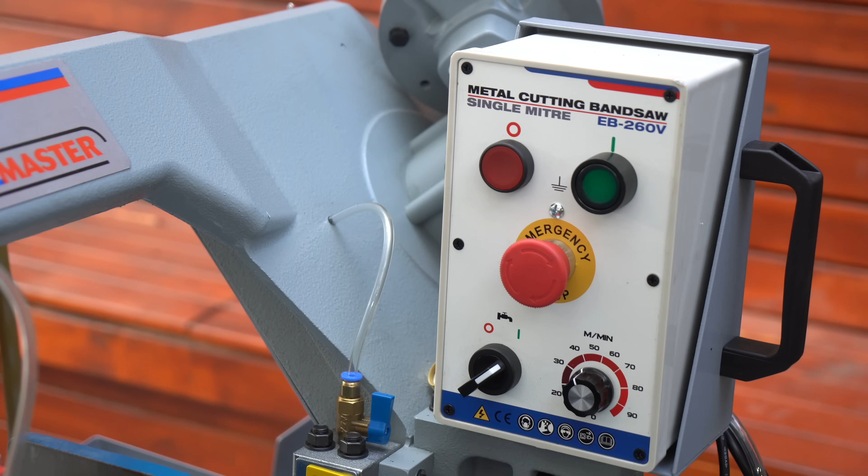I've got a new bandsaw from Hare & Forbes. Now this is the EB-260. Laurie at LCS has one of these, so I've also been using one of these for the past 3 to 4 years, and it is an awesome unit.

Honestly, it's a little bit of overkill for what I actually need in the shed at the moment, but these cut straight and you can adjust them quite easily. If you just pull this lever to unlock it, there's an angle dial down here, and you can adjust what angle you're cutting on, which is awesome for doing miters and for doing tube work and that sort of stuff. And it's got coolant that runs through it.

So my past bandsaw that I had here was tiny and it didn't cut straight at all. So this is a massive upgrade for me. And this is a bandsaw that I'm going to keep for life. I don't see myself needing anything bigger in the future. But again, this has really changed what I can do at home now.

It's going to make things like doing pipe work a lot easier. So we've got a few projects on the go where we have to do a lot of pipe work. We've got George's build, and there's a lot of plumbing on that. And getting a bandsaw that cuts on angles is a massive deal to do plumbing.

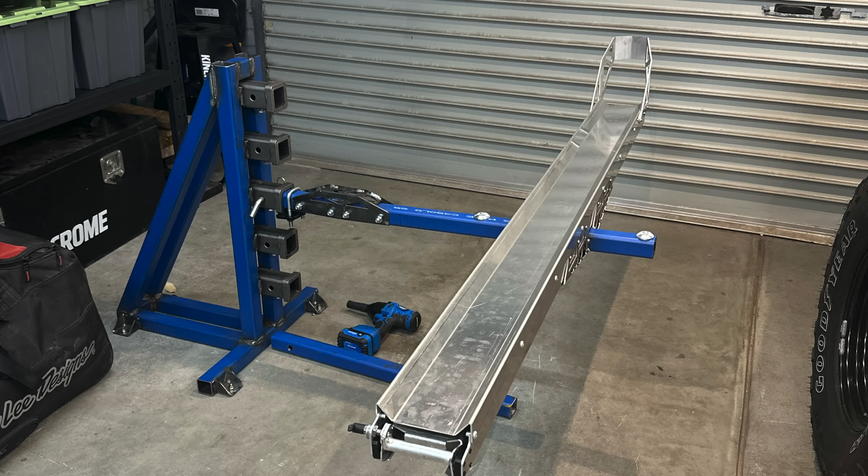I also do a lot of RHS work as well for the bike racks, and that's where this is going to come in really, really handy.

What we have here is a Panbrake from Hare & Forbes. So this is the PB420. Now there is one above this as well, and I think from what I understand, the only difference is that it's got longer teeth. A lot of the stuff that I do, it doesn't really matter, so I've opted for a slightly cheaper option, but honestly, this is exactly what I need at home.

This has got teeth that you can pull out and adjust as need be. If you've been watching my channel for a long time, we've been using a big Panbrake. A lot of the time, I don't need to do long folds. Like even to do a radiator shroud or a canopy fit out, I think I could do most of it on here.

This is good for about 2mm steel, and I've done 3mm alloy on it, as you saw in this video. I'm not sure whether it's supposed to or not, but it does. And it is an absolutely awesome unit for home.

I think this is sort of the bare minimum I'd be looking at if you were going to invest in a Panbrake. In conjunction with the V-block die on the press and the plasma table, I can really do 90% of the sheet metal work I need at home now, which is unreal. It means so much less mucking around, so much less driving, and I can just bang out prototypes really, really quickly.

So that just about covers the new outside section. Let's go have a look at the inside now.

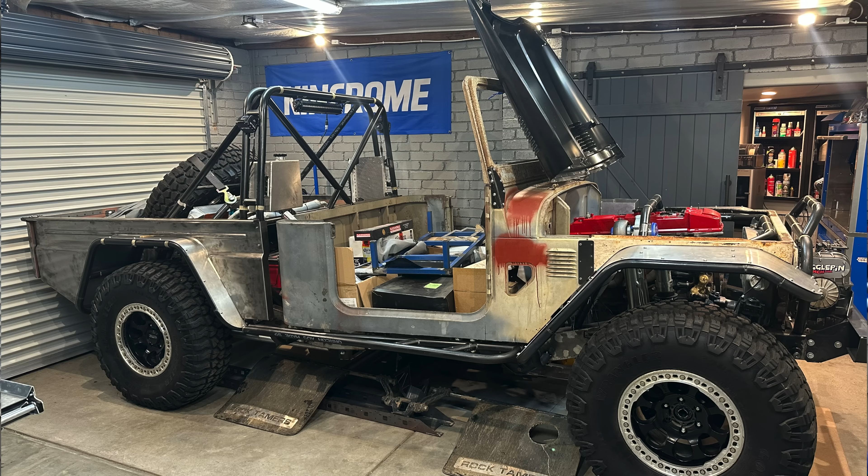Looking over to one side of the shed, this is bare. This is where I put project cars. I've only got space for one project car at a time. George's car was actually living in here - for those of you following along, it's a pretty gnarly custom FJ45 with a Barra, 8-speed, triangulated 4-link, on a chassis, but it's now in storage. There's another project car sitting outside the garage which I'm not going to show you - it's a really cool Kincrome project I'm working on with some other content creators, and that's all going to be revealed in the next few months. Finally, I've got an air hose reel so I can pump up car tires and bike tires now.

In this corner of the shed, I've just got some more storage with storage tubs. I've got them all labeled - moto tie downs, car wash, tow hitches, that sort of stuff.

This is my motorbike rack hitch testing jig, and you may have seen that on the channel before. The next video on the channel will be about testing the motorbike hitch carrier, so make sure you hit subscribe if you're interested in that.

I've got a portable Kincrome table over here, and I find this really handy when you're doing jobs on the car and you just want to put parts or tools on it.

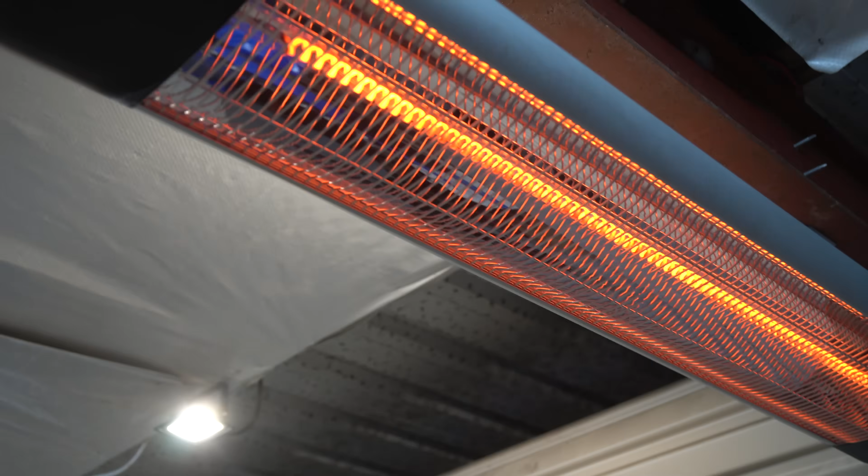A new addition for me are these strip heaters. They're 15 amperes - we can draw a heap of power in this shed if you haven't noticed. It does get a little bit cold in Melbourne, so they're great. They're like 80 bucks off Kogan or something like that.

Over here is the sound system - this is the ECOXGEAR. I've taken it on a trip with me, and it just bolts onto the back of my tray. It's completely weatherproof, a really, really good Bluetooth speaker. I've actually 3D printed a mount for my heater remote and my soundbar remote. This soundbar is fully customizable with neon lighting, so you can hit different colors and it will stay solid or whatever. It's pretty cool.

All we have here in this corner of the garage are some bike racks. For those following along on my channel, you know we developed and released this as a commercial product late last year. I've basically got every variant in my shed, just in case we need to try them out on different cars. So if you're in the market for a bike rack, check out www.doumacarriersystems.com.au. These are designed and manufactured in Australia, and we're really, really proud of them.

While we're doing a shed tour, it's probably a good time to touch on the bikes that I ride. These aren't projects, they're actual things that I ride. So let's start with my dirt bike, the YZ250X.

This is a 2021, doesn't really matter, they haven't changed since '05. Now, why I ride this bike is because of the suspension - it's got KYB and it just feels amazing. I've ridden a heap of other dirt bikes like KTMs and Huskies, and the suspension just isn't as good out of the box - you've got to spend an extra couple of grand to get your chassis performing like this. Some disadvantages of this bike are that it doesn't have an electric start and it doesn't have a hydro clutch. To be honest, the cable clutch on this bike is really good. You can get hydraulic clutch upgrades, but I've never felt the need to.

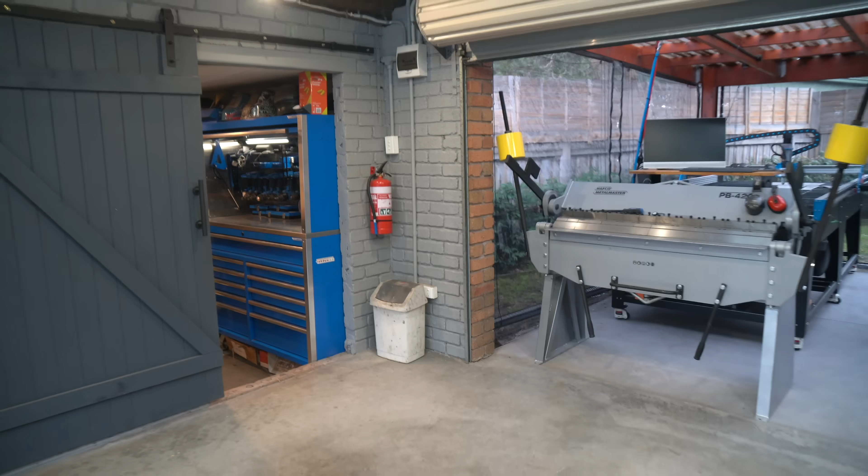Okay, so you've seen my garage now. Let's go into my tiny little workshop. There's a full video on this on my channel, I think I'm just gonna cover it quickly on this one. If you want to see it in more detail, go have another look at the other videos.

I've got a jig/welding table that I built myself. I've got a Unimig MIG, I've got a Unimig AC/DC TIG, so that comes in handy. That's been really good actually, some of the best bang for buck. I use the big bottles, they're the best value for money, about 200 bucks a refill from Speed Gas. On the back wall, I have a heap of grinding and cutting consumables and just some misc stuff.

And then over here, I've got a drill press. I've got a bench grinder/linisher that's probably due for an upgrade, so is the drill press. And then I've got an awesome Dawn vise bolted here, which comes in very, very handy.

Looking the other way now, this is the piece de resistance, really the heart of everything that happens here, the Kincrome toolbox. So this is one of their top level ones, and it's got this nice hutch on the top. Basically I keep all my power tools in there.

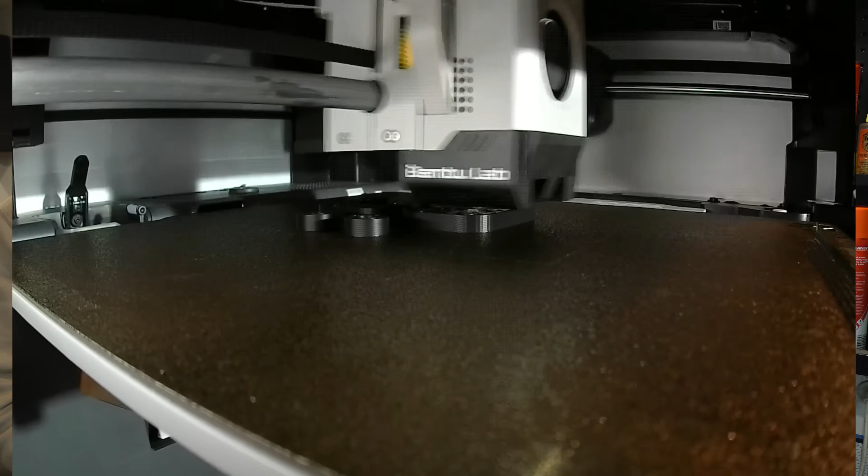This is awesome. When I first started making stuff, the 3D printers were really rudimentary. You had to do the bed leveling, and basically every second print failed. This hasn't had a failed print yet, and we're printing with PLA, but also with ASA a lot, and it is just so good. So if you're going to buy a 3D printer, buy one with an enclosed bed, and if you don't, you'll regret it because the prints stuff up.

Under the benches, I have more storage, more tools. In hindsight, I really should have closed it all in, but I didn't, and I regret it every day. Over here, I have my bolt storage and misc storage. When you're setting up a shed, it's really important to just go buy all the bolts you think you'll need, and you won't regret it.

Down here, I've hung up a lot of my measuring stuff and straight edges and that sort of stuff, so it looks pretty good. I've got my Kincrome blower back there as well, just all hung up on hooks.

Step into my office and you may notice that I've got a lot of screens, and that's because I run two computers. I run a Mac as basically my daily and everything computer. It's just so good for not crashing, not letting me down, and video editing. Then I run a Windows engineering computer over here. I've run both Windows and Mac for maybe the last decade, and once you go Mac, you never go back.

These things are just absolute workhorses. To give you an example, when I used to render videos, like a 4K 30-minute video using an i7 chip, it might have taken 12 hours, but using Apple Silicon, this is an M1 Max, which is maybe 5 years old, it can do it in 12 minutes. It is just astounding what a Mac can do in comparison to Windows.

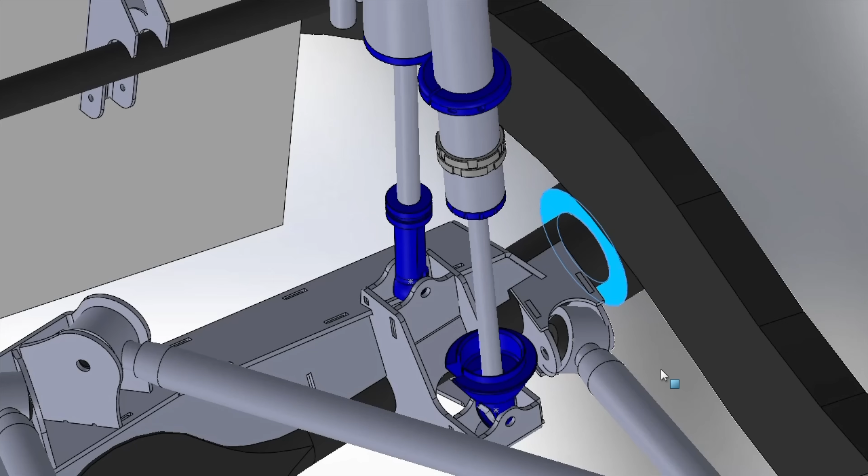I think Windows computers are okay as long as you don't ask too much from them, and if you've only got one or two programs on it, then it can't be asking too much. If you're looking to run CAD on your computer, you need to be looking for something with a good graphics card and plenty of RAM, so that's what this is. You can get a pretty reasonable CAD desktop for about $1,000, then spend maybe something more like $3,000 to $4,000 if you want performance on those bigger and larger assemblies, and that's sort of what I have here.

What I want to note here is that I run a Mac laptop and one single cable to a dock, which charges it and powers all of these screens as well as all these USB accessories. So it's basically the best of both worlds having a setup like this. Literally all you have to do is plug this cable in, one single cable, and then you have a desktop. You can even set it up with a trackpad so it replicates a laptop. I think with Apple Silicon, you just can't go past it for a computer.

That's it for my garage turned engineering workshop tour.